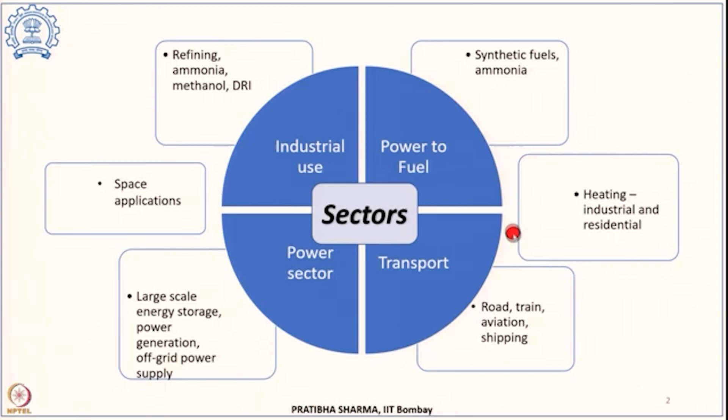At the same time, a certain amount of application of hydrogen will also come from the heating sector, wherein industrial heating, high temperature industrial heat is required, or for residential heating.

Now for a long time hydrogen has been used in refineries. If we consider the demand of hydrogen in refineries, this is 33% of the total demand. In 2020 this demand was 40 million metric tons, and out of that 50% came from catalytic naphtha reforming or from steam crackers, and the rest was either produced by an on-site production plant or externally sourced from a merchant hydrogen plant.

Now we know that the requirement of hydrogen in refineries is for various processes, which we have also seen earlier, that it is used for various hydro-treatment processes and for various hydro-cracking processes.

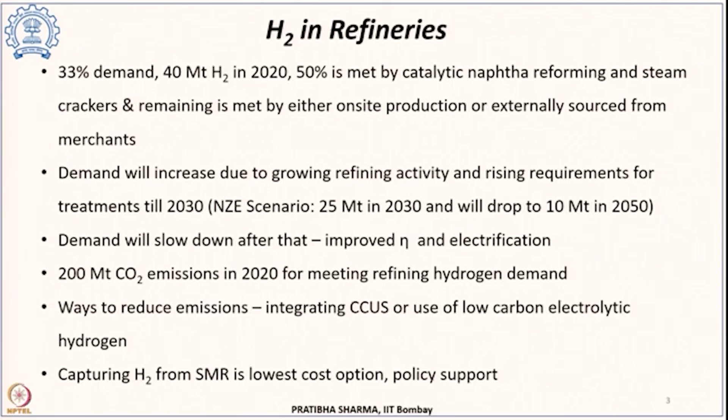This demand of hydrogen will increase due to the growing refining activity and also because of the rising requirements for treatment. As the fuel norms and emission norms get more and more stricter, this demand is expected to increase till 2030, and thereafter there will be a decline in the demand. This is what is being expected.

Now there are different scenarios, like the net zero emission scenario, which predicts that the demand will decrease and become 25 million tons by 2030 and will drop to 10 million tons by 2050. So there are different scenarios. There is a pledged scenario, the announced pledge scenario, which has a different finding; the net zero emission scenario is more optimistic and has different findings.

However, it is also expected that this demand in refineries will slow down after 2030. There will be certain other factors other than the demand of oil and oil products. There will be an improvement in efficiency, there will be increased electrification that will also contribute towards slowing down the demand after 2030.

Now this use of fossil fuels in the refinery is currently contributing 200 million tons of carbon dioxide emissions in 2020 for meeting the demand of the refinery, which is hydrogen demand. But currently most of this hydrogen demand is met by different fossil fuels.

Now to address this challenge of carbon dioxide emissions and to reduce the emissions, the two possibilities are either to integrate carbon capture, use and sequestration, or use low carbon electrolytic hydrogen.

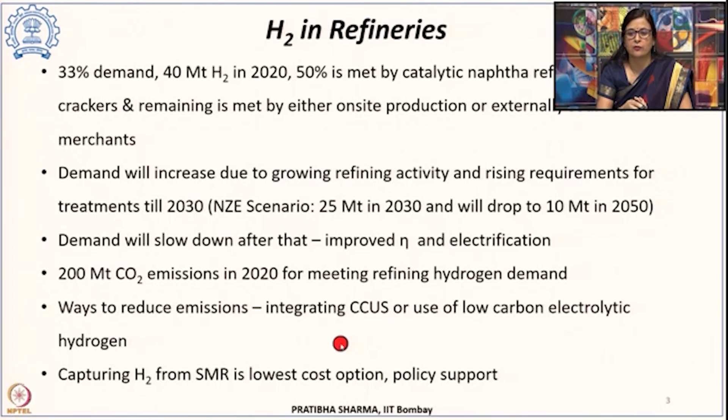Now if we see these two aspects, then capturing hydrogen from SMR plants is the lowest cost option, and integration of CCUS with that will also require policy support.

Now another major sector which currently uses about 40% of hydrogen in pure and mixed form or mixed gases form is the industry which is the second and third largest hydrogen consumer in terms of producing ammonia, fertilizers, and for methanol production.

So the second and third largest demand comes from the chemical industry, and this particular sector is not only a major consumer of hydrogen but also a major producer of hydrogen. But whatever hydrogen is produced in the chemical industry is used within the industry itself, and some amounts are being distributed elsewhere.

So most of the hydrogen used in the chemical industry is currently being produced from fossil fuels. Now if we see the major chemicals being produced, whether ammonia, methanol, ethylene, propylene, or mixed xylenes, hydrogen is an important component. It is a part of their molecular formula for almost all chemicals, but only for ammonia and methanol, which are the primary chemicals, are dedicated hydrogen production facilities present in their industries.

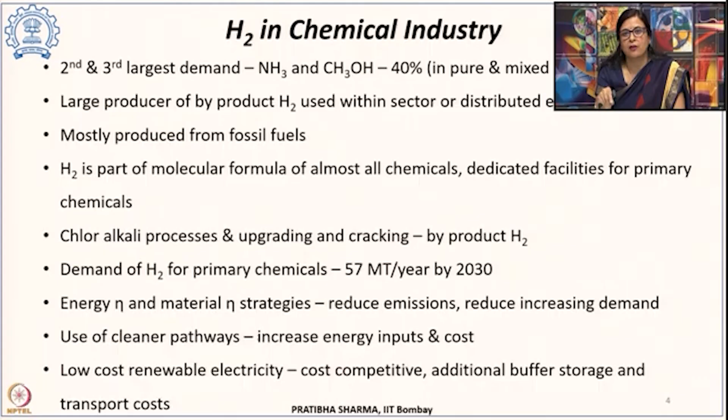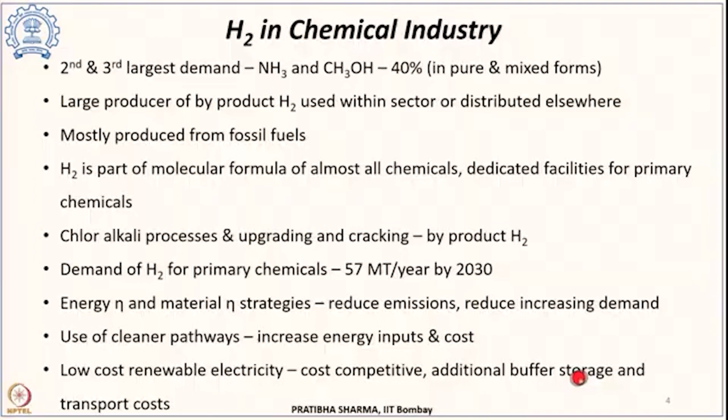But the only additional requirement will be that since this renewables based electricity will have intermittency associated with it, there will be an additional requirement of buffer storage, and these renewable power plants may not be close to the chemical industry. So there will be a cost associated with transport of hydrogen.

Now another major segment wherein hydrogen is being used in a mixed gas form is another major industry - the iron and steel industry - and that is the fourth largest demand, for DRI, direct reduction of iron for production of steel.

It is also like the chemical industry, another major producer of hydrogen, but that is in mixed gas form, coke oven gas, and whatever hydrogen is required currently is being produced from fossil fuels. So that leads to a lot of emissions.

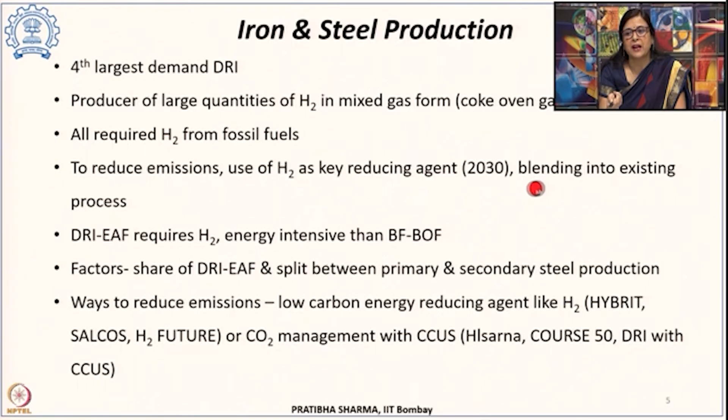If we want to reduce those emissions from hydrogen production for use in the iron and steel industry, the requirement is, instead of using other carbon based hydrogen, to use pure hydrogen as the key reducing agent. There are commercial projects which will demonstrate that, and these will be operational soon. Or the other possibility could be to use hydrogen as the key reducing agent, or blend it with existing processes to a certain extent.

Now the two major processes used in the iron and steel industry for production of steel are DRI-EAF, that is direct reduction of iron electric arc furnace, and BF-BOF, that is blast furnace basic oxygen furnace. The hydrogen requirement is in DRI-EAF, and it is an energy intensive process compared to the conventional BF-BOF process.

What will determine the share or hydrogen demand in the iron and steel industry is basically factors like the share of electric arc furnace route against the basic oxygen furnace blast furnace route, and at the same time the split between primary and secondary steel production.

So if we want to reduce emissions associated with this hard to abate sector, the ways could be either to use a low carbon energy reducing agent, which is hydrogen - there are different demonstration plants like Hybrit, Salcos, Hydrogen Future, wherein hydrogen is projected as the reducing agent - or another possibility could be carbon dioxide management using CCUS, like Hisarna, Course 50, DRI with CCUS - these are the DRI with CCUS plants.

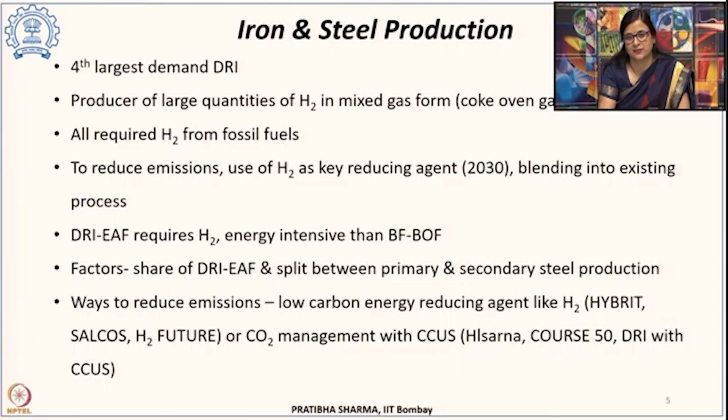Now if we quickly see the major global projects which are ongoing, in the industrial segment the demand is 51 million tons. It is expected that by 2030, one third of the electrolytic hydrogen projects will be operational.

Now coming to the iron and steel industry, blending of hydrogen in DRI and blast furnaces as a substitute to coal and gas - the different projects ongoing are Salcos in Germany, Hydrogen Future in Austria, and there they are substituting natural gas with electrolytic hydrogen. It is accounting for 1 kiloton of hydrogen usage per year.

ThyssenKrupp in Germany have successfully tested the substitution of coal with hydrogen in blast furnace. The Hybrit project in Sweden aims to produce sponge iron using 100% hydrogen in combination with biomass by 2025.

Similarly, there are several demonstration projects using electrolytic hydrogen for methanol production, like in Netherlands, Belgium and Sweden, and use of electrolytic hydrogen for ammonia production. These are ongoing in Spain, US, Denmark, Norway, Australia and Netherlands.

Now if we quickly see similar such projects, about 42% of these are for large scale industrial usage, 26% for the transportation segment, about 10% are dedicated for infrastructure projects, 8% for gigawatt scale production, and 14% are for integrated hydrogen economy based projects.

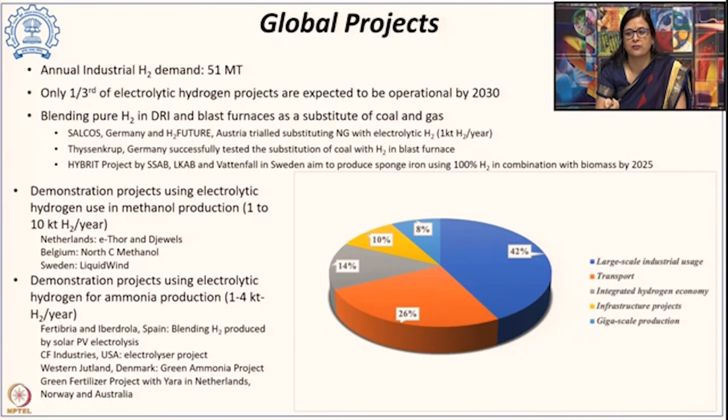Another major segment where hydrogen can be used in future is providing high temperature industrial heat. This heat is used in industries for different processes and operations like melting, gasifying, drying, and several chemical reactions. Either this heat is directly supplied in a furnace, or it is given indirectly, like first steam is produced and then that is used to meet the heating demand.

This requirement of heat can be categorized into three categories: low temperature heat less than 100 degree centigrade, medium temperature 100 to 400 degree centigrade, or high temperature greater than 400 degree centigrade. The major global demand of this high temperature industrial heat comes from the cement industry, iron and steel industry, and other industries.

The demand of this industrial heat will continue to increase even if strong climate change mitigation measures are taken. However, there will be some minor reductions owed to energy and material efficiencies.

Currently there is no hydrogen being used in this sector, but in future there will be demand for hydrogen or hydrogen rich fuels to reduce the emissions that come along with industrial heat supply. It could be hydrogen, but the usage of pure hydrogen has several challenges. So it will be hydrogen rich fuels which can reduce the emissions associated with industrial heat production.

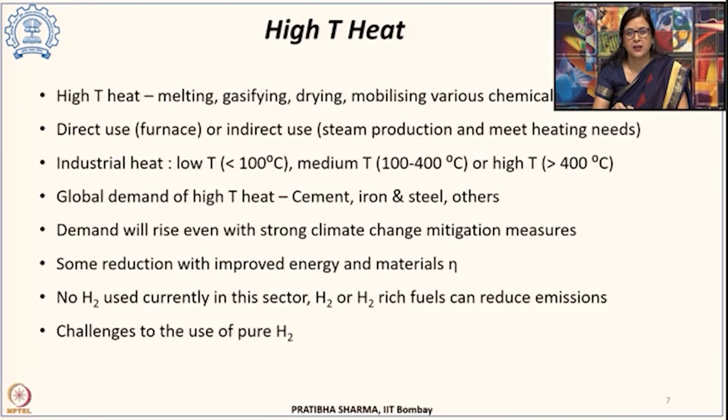The major application that may find its way in future is hydrogen usage in the transportation sector. Twenty percent of global greenhouse gas emissions comes from the transportation sector, at the same time it uses 25% of the total global energy. Ninety percent of the energy used in the transportation sector comes from oil products.

If we are able to electrify it by either battery electric vehicles or fuel cell electric vehicles, the emissions related to the transportation sector could reduce. Fuel cell electric vehicles can have the potential to reduce local air pollution as they have no tailpipe emission, like the battery electric vehicle.

It is also possible that other than hydrogen, other synthetic fuels like synthetic methane, methanol, ammonia, or other synthetic liquid fuels can find their application in a wide range of transportation applications.

If hydrogen is produced through the electrolytic route and then that hydrogen is used to produce synthetic liquid fuels, it is known as power to liquid. The production of these synthetic fuels is expected to increase, and this demand of hydrogen for synthetic fuel production will grow to 7 million tons or higher by 2030.

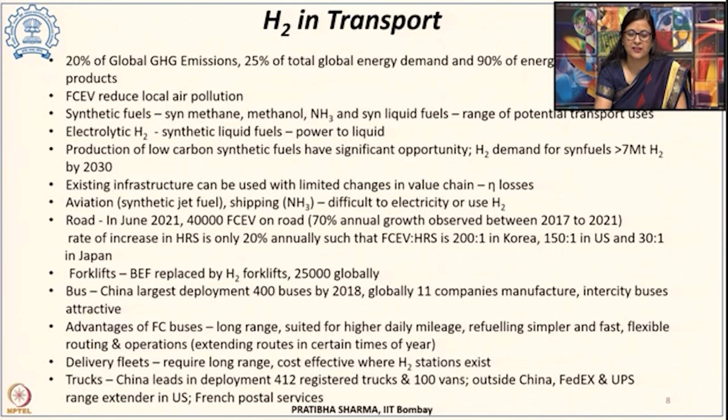This use of synthetic fuels has several advantages because we can use existing infrastructure, and as such we will require very limited changes in the value chain. However, efficiency losses will be involved because we are converting it into different fuels, first to hydrogen and then into synthetic fuel.

For the aviation sector, synthetic jet fuel will have potential. For the shipping segment, ammonia could be used. But these sectors, aviation and shipping, are where it is very difficult to either directly electrify or use hydrogen. So there, these synthetic fuels or hydrogen rich fuels will have potential in future.

When it comes to road transport, in June 2021 there were about 40,000 fuel cell electric vehicles on road, and the positive point was that 70% annual growth was observed between 2017 and 2021. But the rate of increase in hydrogen refueling stations was not to that scale, it was only 20% annual increase observed in this period.

There are about 25,000 forklifts globally operating, and this is one of the important uses of fuel cell based operations. Among bus transport, China has the largest deployment of 400 buses as of 2018, and there are globally 11 companies which manufacture fuel cell buses, which could find its way for intercity buses.

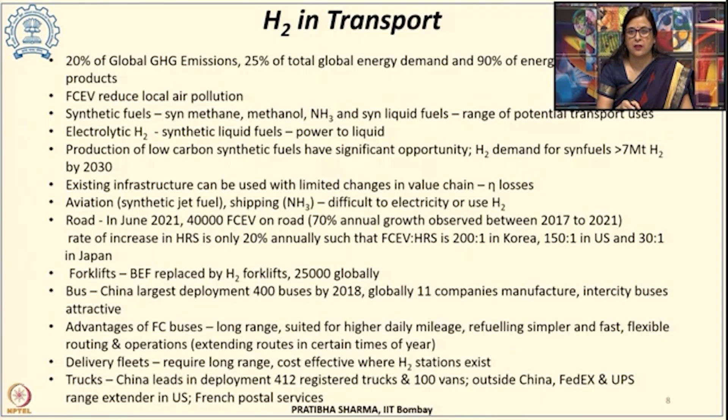Among trucks, China is the leading country, having 412 registered fuel cell trucks and 100 vans. Outside China, FedEx and UPS are coming up with range extenders in the US, and the French postal service is also acquiring hydrogen fuel cell trucks.

Among rail, we know the well known Alstom train. There are now 2 such trains in Germany which have travelled more than 180,000 kilometers of distance. Austria is coming up with a regular passenger service in 2020. UK and Netherlands are coming up with a pilot fuel cell rail. France, Italy, and UK have placed orders for trains.

In the shipping sector, green ammonia is looked at as a potential alternative to power ships by 2023. For aviation, Airbus is exploring a hydrogen powered aircraft concept, to be used by 2035.

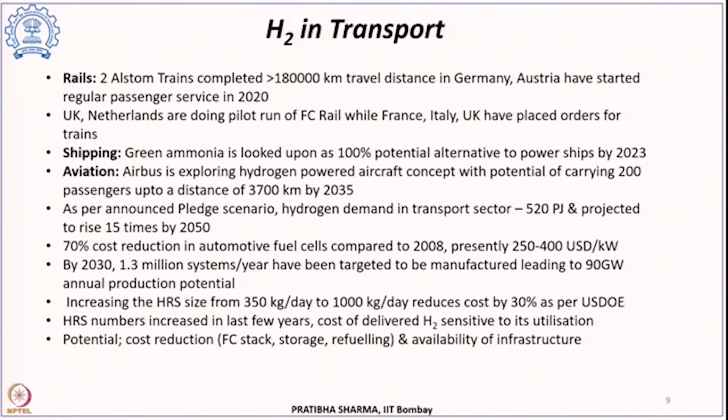As per the announced pledge scenario, the hydrogen demand in the transportation sector will be 520 petajoules, and it is expected to rise 15 times by 2050.

On a positive note, the cost of automotive fuel cells has reduced by 70% compared to 2008. By 2030 it is expected that there will be 1.3 million systems per year manufactured, leading to 90 gigawatts of annual production potential.

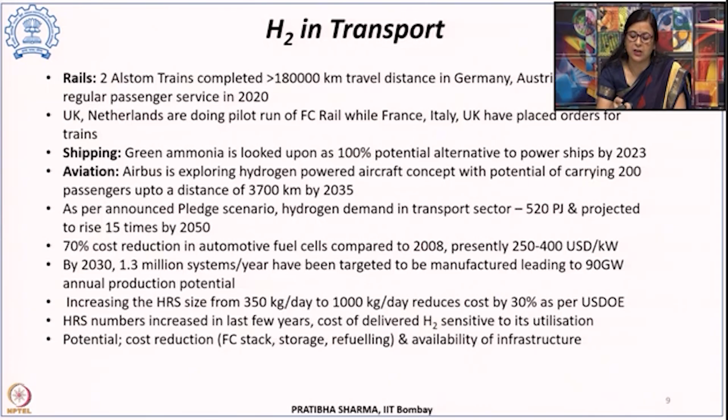All these changes will require cost reduction in terms of fuel cell stack cost, hydrogen storage cost, and refueling cost, along with availability of infrastructure and hydrogen refueling stations.

When it comes to use of hydrogen in the building sector, it consumes 30% of global final energy. As such, hydrogen is not currently being used in buildings, but it has potential if blended with natural gas, in which case it can be used for various operations.

Although blending of hydrogen with natural gas, or pure hydrogen, may not suffice for all building operations, blending with natural gas could be used for heating purposes in countries where a lot of heating load requires natural gas.

There have been several demonstration projects ongoing, like the H21 North of England, which is planning for heating demand that could be met 100% by hydrogen.

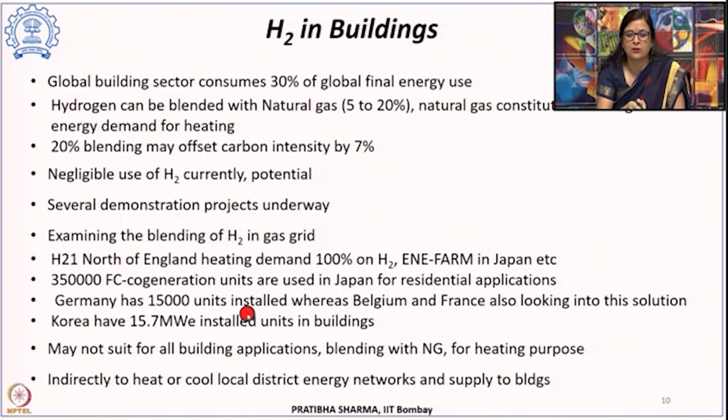In Japan, there are about 350,000 fuel cell cogeneration plants meant for residential applications. Germany has about 15,000 units installed. Belgium and France are also looking into such solutions.

Another major segment where hydrogen will find its way is power, both for power generation and energy storage. Currently it has a negligible role in this sector, but it is predicted there will be a change in the future. For power generation, the possibilities are co-firing of ammonia to reduce carbon intensity in conventional coal power plants.

As well as hydrogen fired gas turbines and combined cycle gas turbines, which will provide flexibility with the increasing share of renewables.

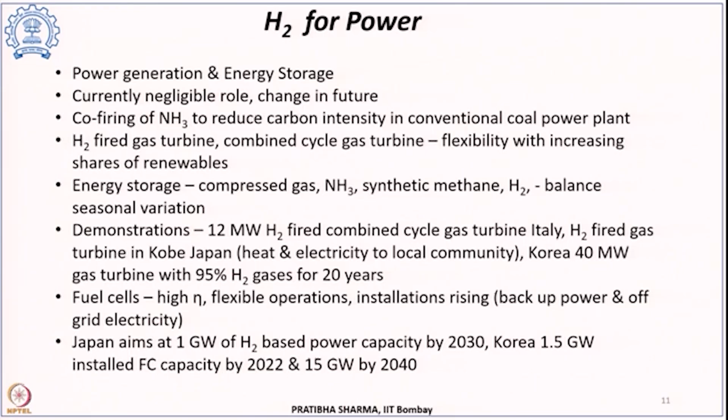For energy storage, either compressed gas hydrogen can be used, or ammonia, or it can be converted into synthetic fuels, which will help in balancing seasonal variation or taking care of the intermittency of renewables. There have been several demonstrations going on across the world.

A 12 megawatt hydrogen fired combined cycle gas turbine was demonstrated in Italy, and a hydrogen fired gas turbine in Japan is providing both heat and electricity load to the local community.

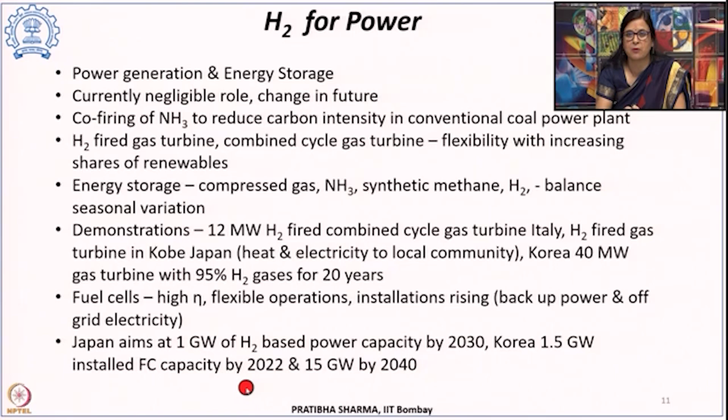Korea has been using a 40 megawatt gas turbine with 95% hydrogen for the past 20 years. Japan aims at 1 gigawatt of hydrogen based power capacity by 2030, while Korea aims at 1.5 gigawatt of installed fuel cell capacity by 2022, and 15 gigawatt by 2040.

Japan was the first country which came up with a national strategy, and that was in 2017.

Today, there are about 30 countries which have come up with their strategy documents, roadmaps, and mission documents mentioning how they are going to deploy different hydrogen based technologies.

Some representative examples are Japan, which came up with its strategic document on hydrogen and fuel cells in 2019, with another revision in 2020 and 2021 called the Green Growth Strategy.

The targets for deployment are that they will be using 3 million tons of hydrogen per year, along with low carbon hydrogen which will be 420 kilotons of use per year. Japan has targeted 8 lakh fuel cell electric vehicles, 1200 fuel cell buses, 10,000 fuel cell based forklifts, and 900 hydrogen refueling stations by 2030.

The method of hydrogen production that will be used for meeting the hydrogen demand will be electrolysis and fossil fuels with CCUS. The major use of hydrogen based technologies will be for buildings, electricity, steel industry, refineries, shipping and transport, with a fund of $6.5 billion announced by 2030.

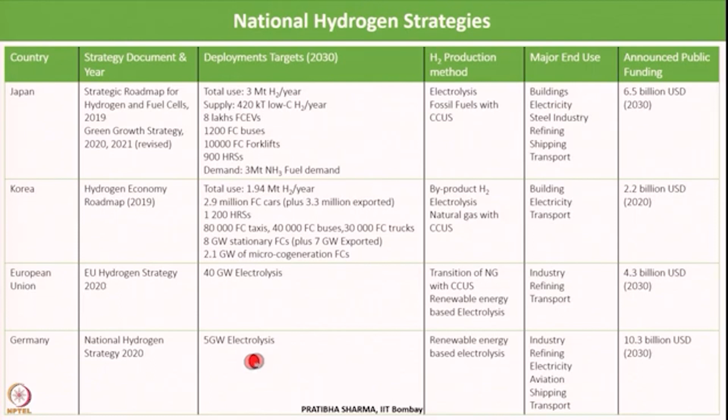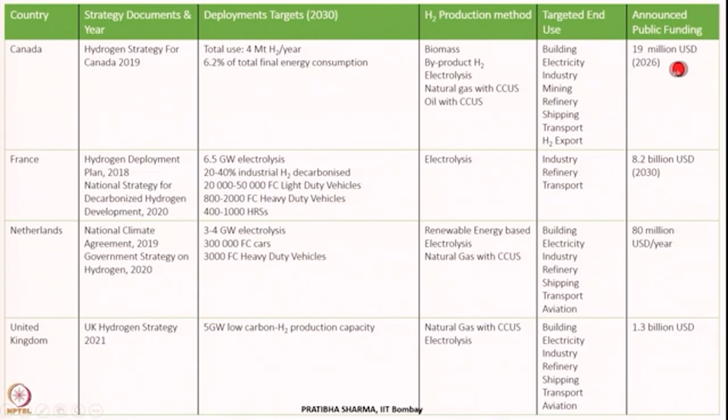Similarly, several other countries have come up with their strategies, like Germany with a target of having 5 gigawatts of electrolysis installed by 2030. Canada has a hydrogen strategy, a document released in 2019, targeting 4 million tons of hydrogen usage per year with funding of $19 million. Similarly, France, Netherlands, United Kingdom, Norway, Russia, Spain, Portugal, and Czech Republic have come up with their hydrogen strategies.

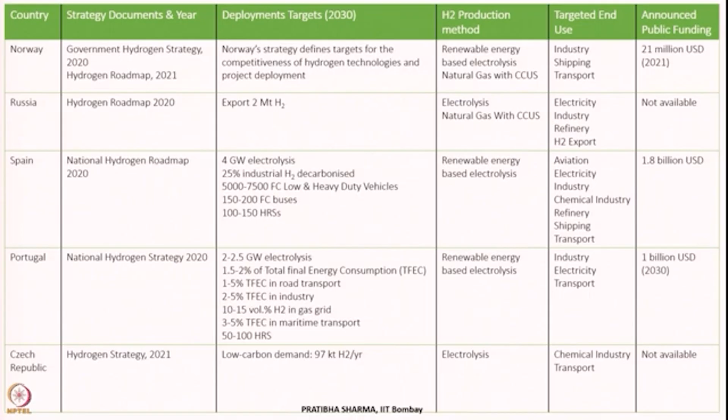Just to give some major global updates, China has been leading. China has 24 million tons of hydrogen consumption per year, and this is the world's largest user as well as producer of hydrogen. Since 2019, China had more than 30 green hydrogen projects in operation. They came up with their first hydrogen roadmap in 2016 and basically focused on transport.

So there are certain countries who have not come up with strategies but are still leading. They have 8,400 fuel cell electric vehicles and are the third largest FCEV fleet in operation after Korea and US. Although they do not have a strategy, they came up with 5-year plans from 2021 to 25, with the major focus being that hydrogen will be a leading industry out of 6 industries.

The European Union came up with their strategy in July 2020, and they have mentioned that hydrogen will be given key priority with focus on renewable hydrogen. The major target is to install 40 gigawatts of renewable hydrogen electrolyzers by 2030, which is a huge number, and they aspire to become an industrial leader in clean hydrogen.

Now, if we look at India's country status, the National Hydrogen Energy Mission, launched by our Honorable Prime Minister on 15th of August, aims at meeting India's climate change targets and making India a green hydrogen hub. This is towards taking a quantum leap towards achieving energy independence by 2047.

There will be 2 solar powered hydrogen refueling stations at the 2 tourist spots between Delhi and Agra, and at Gujarat. One pilot green hydrogen production plant to replace conventional hydrogen with green hydrogen in refinery. Another one wherein a green hydrogen plant will replace and be blended with CNG at a retail dispensing outlet. Similarly, there are other such pilot projects planned.

In February 2022, the Ministry of Power, Government of India, launched the green hydrogen and green ammonia policy, where the target is that hydrogen and ammonia are looked upon as future fuels to replace fossil fuels. There have been several incentives and benefits provided to related stakeholders, and proposals like refineries meeting 10% of hydrogen demand through green hydrogen, increasing to 25% in the next 5 years.

Similarly, fertilizer industries will meet 5% of their hydrogen demand by means of green hydrogen, which will be further increased to 20% in the next 5 years.

Now, if we look at the major barriers towards widespread deployment of hydrogen based technologies, the first major barrier is the cost of green hydrogen, which is high compared to high carbon fuels, and the cost involved in all aspects of the hydrogen value chain, whether transport, storage or utilization, is relatively high. However, economies of scale and the learning curve will reduce that cost.

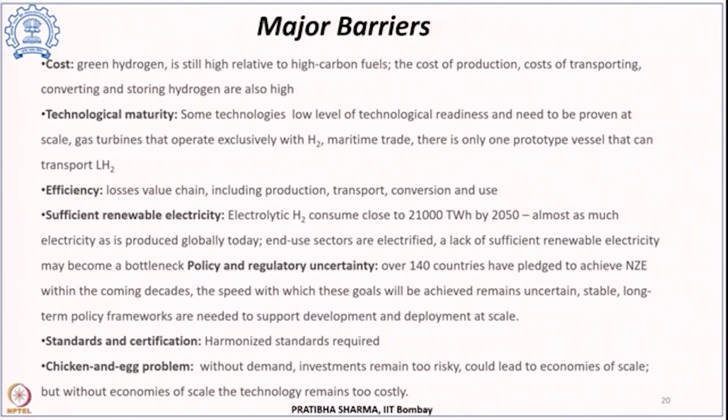At the same time, some technologies like power generation with gas turbines using hydrogen are not at the required TRL levels, and that will take some time. Since the process involves several steps, there are losses involved in the entire value chain, whether production, transport, conversion or usage, so the efficiency becomes relatively lower.

At the same time, if the entire hydrogen demand is to be met by electrolytic hydrogen, the requirement of electricity will be very high, and when electrification together with the use of electrolytic hydrogen is going on, there may be a lack of sufficient renewable based electricity that may become the major bottleneck.

At the same time, there is a requirement of harmonized standards and policies, so that standards, regulations and regulatory certainty should be there, so that international trade could increase. That will speed up the goals of either the net zero emissions scenario or the announced pledge scenario.

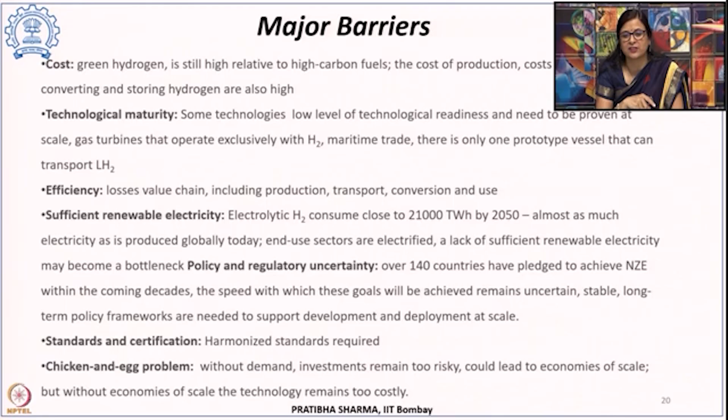And finally, the chicken and egg problem, wherein without demand the investment becomes risky, and the cost will come down with economies of scale, but without economies of scale the technology remains too costly. So that remains a chicken and egg problem.

So, the key points from the entire global and Indian scenario is that renewables together with energy efficiency will be responsible for the new energy transition, wherein hydrogen is going to play a key role, and it will play a role towards climate change mitigation strategies.

It is expected that 20% of the final energy consumption will come from green hydrogen by 2050. It will be used for the transportation sector, specifically for long distance transport, and the usage of hydrogen will promote energy trade.

There are certain countries with enough renewables deployment where renewable power pricing is less, and these will become the major producers of green hydrogen.

When it comes to hydrogen trade, there will be countries which become major exporters, and that business will become more and more competitive. So there will be cross border trade of hydrogen, and geopolitical relationships will change. Countries which have not done energy trading will now come into bilateral energy relationships.

Some countries which have been major importers of energy will become exporters because of their renewable power generation. Energy demand will increase by 2035, and then there will be huge market potential and economic competitiveness with the use of hydrogen based technologies.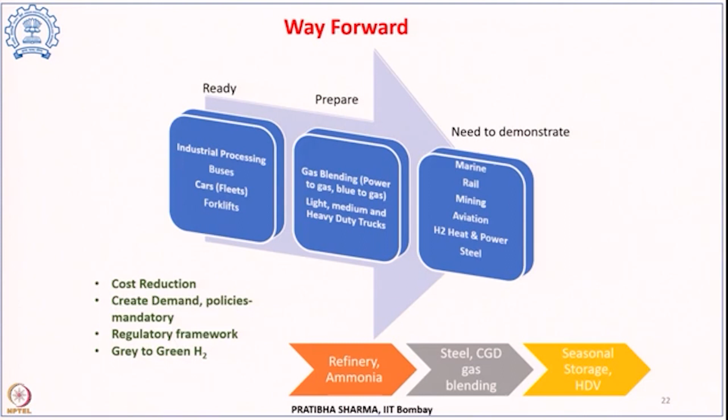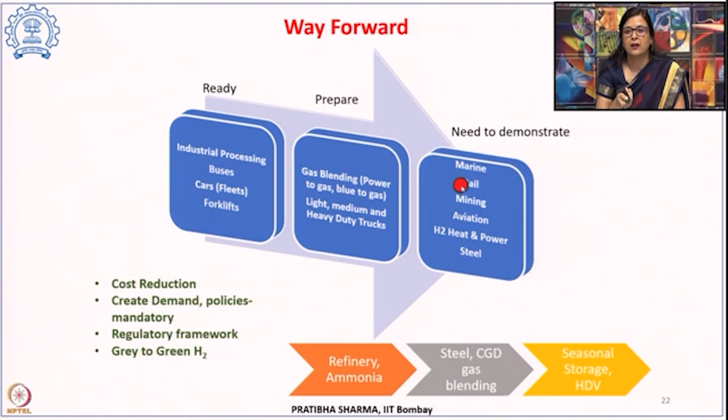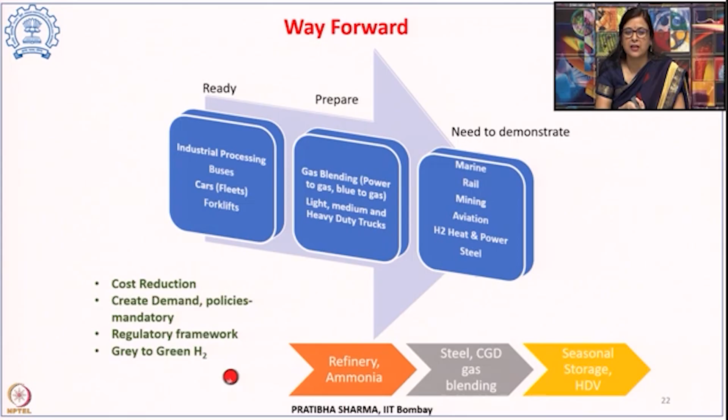The major driving factors will be cost reduction, creation of demand, requirement of policy mandates, carbon pricing, policies which mandate the use of green hydrogen, regulatory framework, and conversion from grey to green hydrogen.

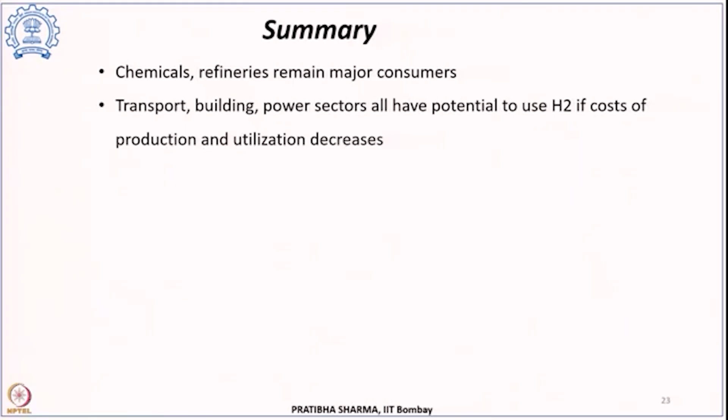To summarize, we have seen the different sectors currently using hydrogen and those which will use hydrogen in future, wherein chemical refineries remain the major consumers, being the conventional sectors which have used hydrogen for decades. However, certain segments will come up with hydrogen demand, like transportation, building and power sectors, and there the requirement will be to reduce the cost of production and utilization.